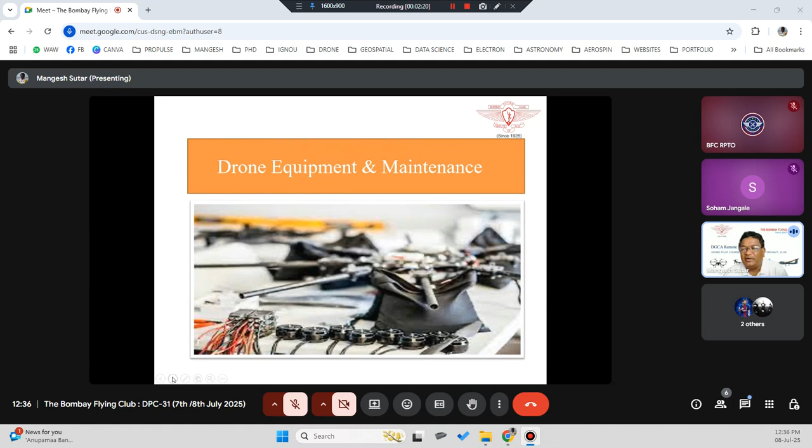Okay, so similarly our drone also requires a lot of maintenance. One is day to day regular maintenance, and one is comprehensive maintenance. Depending upon what is defined by your OEM, accordingly we will be doing our maintenance, but there is some regular pattern we have to follow for maintaining our drone.

Regular usage may result in wear and tear of the unmanned air vehicle, thus requiring regular maintenance checks. So every time you are going to take a flight, you are going to do some maintenance check, some pre-flight checks.

Comprehensive maintenance has to be performed after every 200 flights or 50 flight hours. This is similar to your car.

Whenever you take a new car, what happens is the first servicing has to be done within a period of 1 month or maybe 100 kilometers, whichever is earlier. If in one month you haven't driven 100 kilometers, but the month is complete, you still have to come for servicing. And if within 7 days you drive 100 kilometers, then immediately after 100 kilometers you have to take your car to the service center.

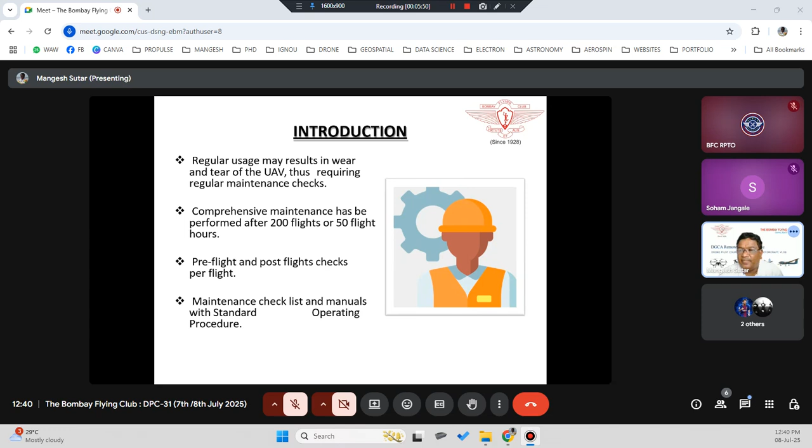So what are the things covered in the checklist? One is structural inspection. You are actually checking the structure of the drone. Clean the airframe of mud and dirt, inspect the airframe for cracks, check for any loose screws, check propellers for damages, check propeller for free-spinning, check motor for debris and obstructions, check wirings and solder joints, check gimbal and camera lens are clean, check landing gear condition, inspect antennas.

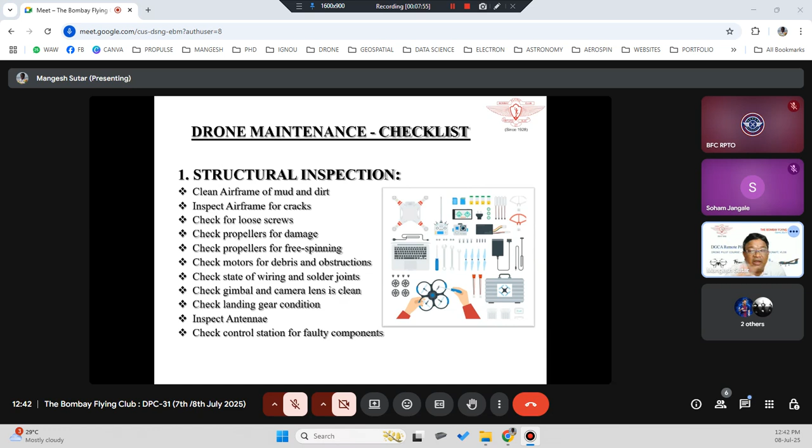One time a guy dropped our remote control, and it fell on the antenna, so the antenna broke - there was a crack. We just ignored that at the time, but later we started facing problems when communicating. We realized the antenna was damaged, so we immediately ordered a new antenna and replaced it. It started functioning properly. So never ignore even minor defects or minor issues - it can lead to bigger problems later. In aviation, the instruction is very clear: even the smallest crack or smallest missing item should not be ignored. This is a rule of aviation.

Drone maintenance checklist also includes battery checks - inspect charger for visible damage, inspect battery packs for bulge or leakages. Make sure you charge all the batteries. Do not use half charged batteries. Make sure whenever you are taking a flight, your batteries are 100% charged. Don't use half charged batteries.

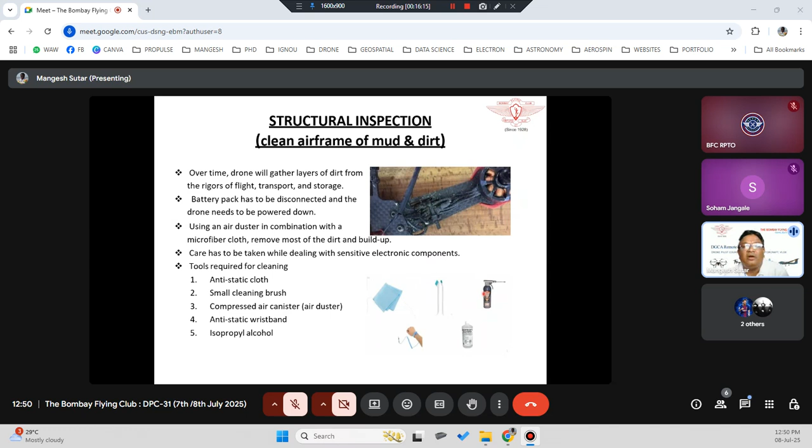Check and inspect the airframe for cracks. As I said, even the smallest crack can cause a critical problem if left unnoticed. It's a rule of aviation that even the smallest crack should be documented and rectified on time — don't live with that problem.

So rectify it on time. During routine maintenance, check each component carefully and make a note of any damage you find. Whenever you run your checklist, if you find any problem, make a note. Make sure that note is visible to the person auditing it, and that it gets rectified before the next flight — that's your job.

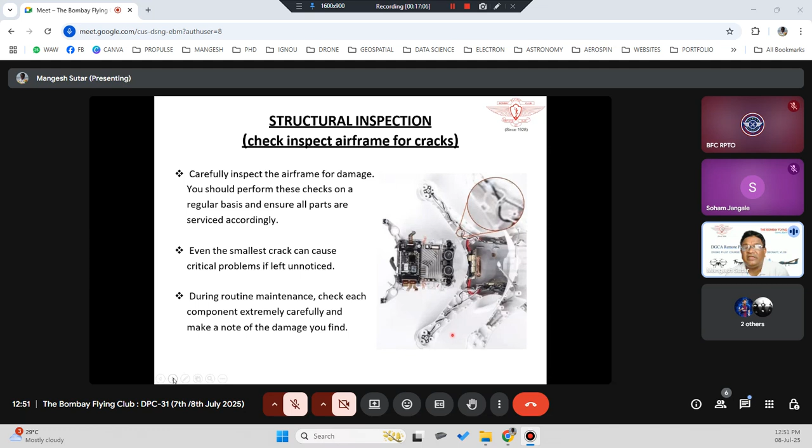Don't hesitate to put remarks in the maintenance log. If you feel there's a problem, there is a problem. You'll be safeguarding yourself in your activity and your task.

Every component should be securely tightened in place during maintenance repair. Double-check the fastening bolts, but don't over-tighten. A lot of times when we change a component, we tighten it too much.

That over-tightening can cause cracks — like you can see here, there's a crack because of over-tightening the nut and bolt. So don't over-tighten, and don't put unnecessary stress — tighten only as much as needed, not more.

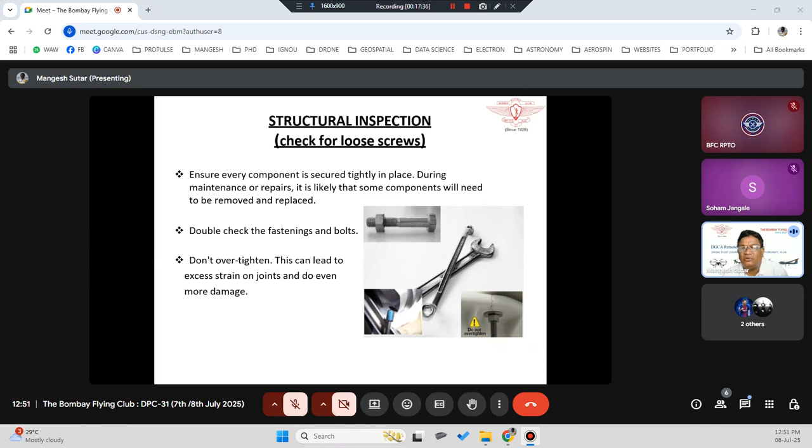Propellers are the only component that go through a lot of stress and movement, so they're the most likely to get damaged quickly. Dirty, chipped, or cracked propellers should be removed — if there's dirt, get it cleaned.

If there's a break or crack on the propeller, you should replace it immediately. Inspect for cracks and check the proper fitting of the props to the motor.

Unattended cracks can lead to mid-flight failures. If there's a crack, clearly visible, you should not take the flight — you should immediately replace that propeller, because a crack can break further under flight stress.

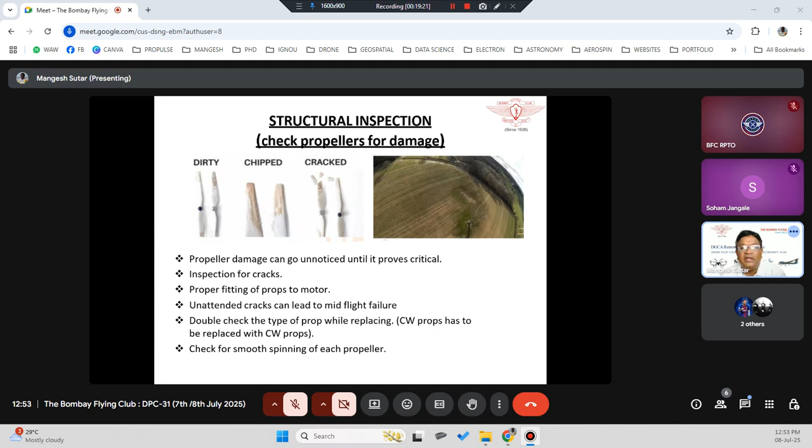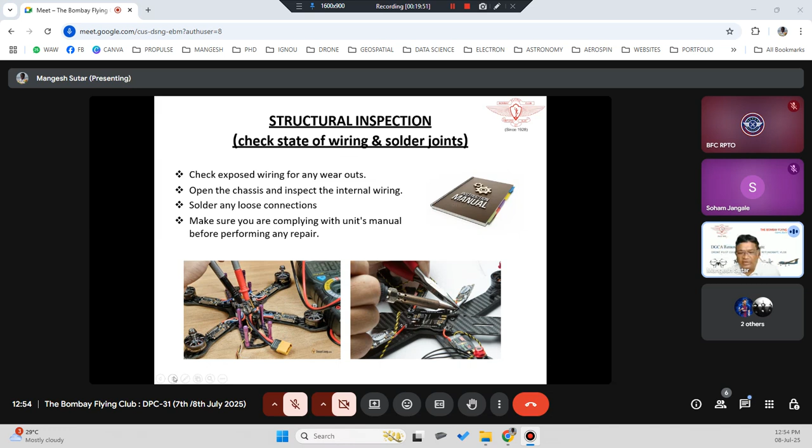Check the state of wirings and solder joints. If you have an FPV-type drone or any drone where the soldering joints are visible, make sure you check them. Sometimes due to weather or dryness over time, the solder joint dries out and you lose the connection, or the connection breaks entirely because of climatic impact. It happens sometimes. So make sure that is clean.

Again, if you feel there is some friction happening in the motor, you can open the motor provided you are aware of how to do it. If you are not aware, don't do that - call a technician or specialized person who knows how to do it.

Or you can attempt it on your own, but your drone may be under warranty or AMC. If it is under warranty or AMC, always ask for the engineer to come and do it. Our drones are under warranty and AMC.

So normally I never do it myself, except changing the propeller - that's the basic thing. But if there is something internal, a software related problem, or anything else, I will always log a case with the OEM. The engineer will visit my place, do the necessary check, do a test flight, and then certify that the drone is in good shape.

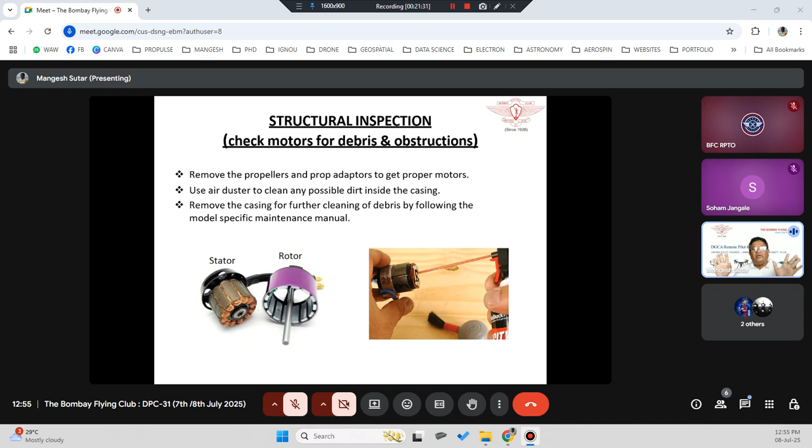So structural inspection again for all - the camera unit, the landing gear. Like yesterday I talked about it, whether spring loaded or hydraulic loaded landing gears are there. Whatever is there, you should make sure they have smooth movement, smooth functionality, normal functionality, whatever.

A lot of times your landing gear will also have rubber rollers, just to safeguard the metal part of it - there's a bit of rubber cushioning on it. So sometimes over a period of time, with multiple landings, say 100 up and down landings, that rubber gets worn out.

A lot of people, when you order, you don't just get one rubber matting or rubber roller - you get 4, whatever is required, 4 or 6 you will get. So normally people think one is worn out, let me just remove and change that one. But then your drone will be uneven. So when you are changing those rubber rollers, you have to make sure you change all 4.

Don't compromise on that - change all 4, because even if the others are more or less worn out too, don't leave it uneven for your drone, because a new one will be in noticeably better condition.

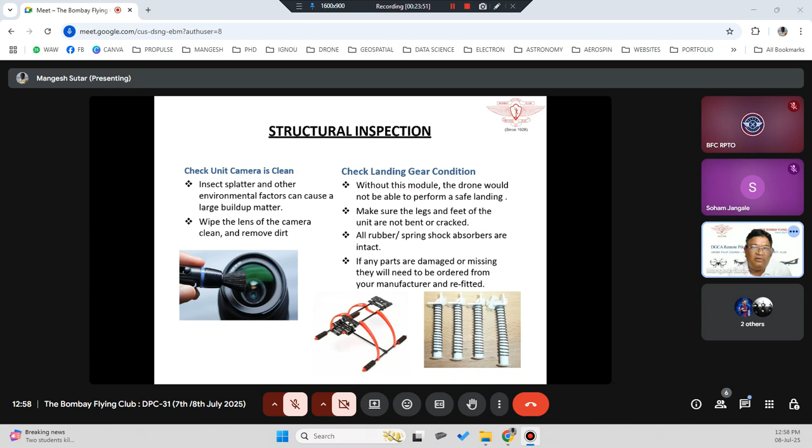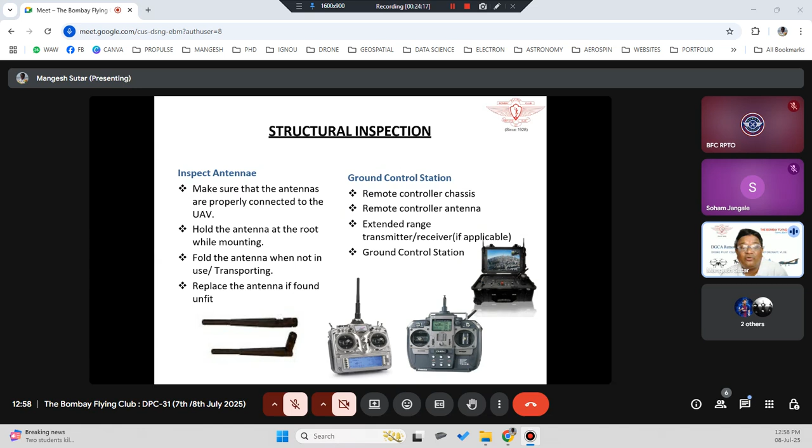Structural inspection for antenna, ground control station hum log discuss kiya, like antenna agar kuch break hai, yeh hai. When you are operating your antenna, it should always be open, straight, pointing towards the drone, and all the things you should make sure. Okay, so this is what important. Transportation ke time pe, folding ke time pe kabhi kabhi antenna toota hai, break hota hai, fault ho jaata hai, crack ho jaata hai. So if you found that kind of problem, you should replace those antennas.

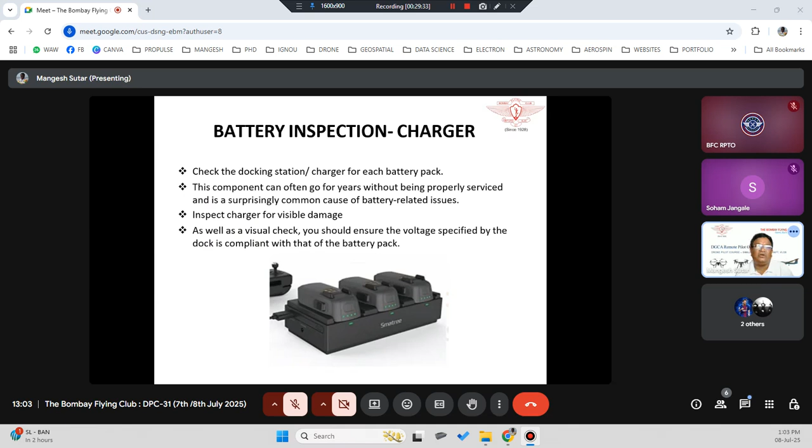I will tell you to do it yourself. If you want to do it, you can do it; if you don't, I will do it. But me doing it is no point - you have come here for learning. Take that opportunity, because tomorrow, once you are out of the training site, you are not going to do all these things. So whatever time you spend in the next 3 days from tomorrow, spend that considerable time learning things about drone technology.

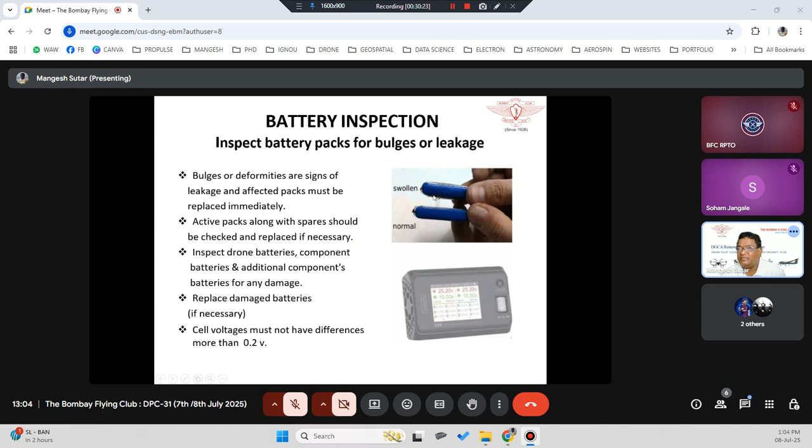We talked about updating the drone firmware and software. For DJI drones, DJI recommends always keeping the software and firmware updated. But for type certified drones, DGCA doesn't recommend updating. So depending upon what drones you are using, you have to take a call on this.

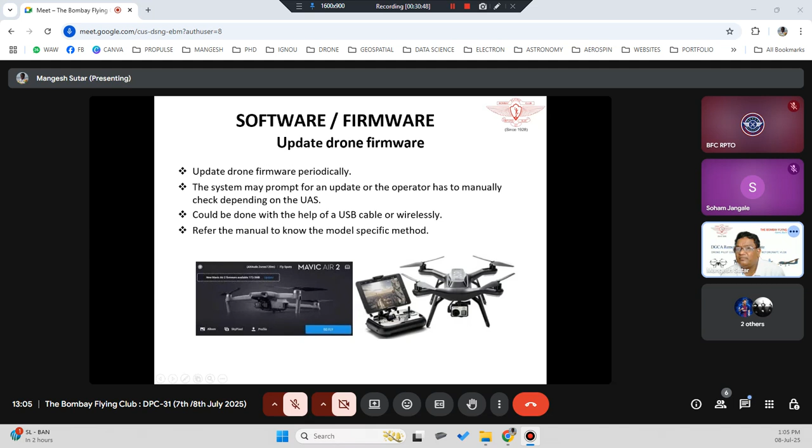Okay, again for the software also the same thing. So when you should schedule servicing - you should schedule servicing for airframe, propellers, motor, gimbal, landing gear, camera, depending upon the usages.

So whenever you are servicing, make sure that you are disconnecting the batteries and everything, and then you are doing the servicing. Whether you are changing the motor, propeller, or airframe, whatever changes you are going to do, make sure you dismantle, put things properly, and do the changes. When you change it back, you have to do all the checks properly, and only then should you fly it. That's what we call a test flight.

So if it is done by the service person or technician, he will normally do a test flight and make a remark: test flight done for 5 minutes, all conditions proper, functioning properly, found no problem. He'll certify the drone. You have to make sure he writes this; if he is not writing, ask him to write. He has to certify that this drone is good to fly, by another person - that is what he needs to certify as a technician.

Okay, the propellers, as I told you, we'll discuss this in detail when we see the actual drone and propellers - changing of the propellers and all that. So remove the damaged propeller, observe the propeller orientation, retrieve matching replacement. If clockwise is removed, put it back clockwise; if counter-clockwise is removed, put it back counter-clockwise. That's what it's trying to say.

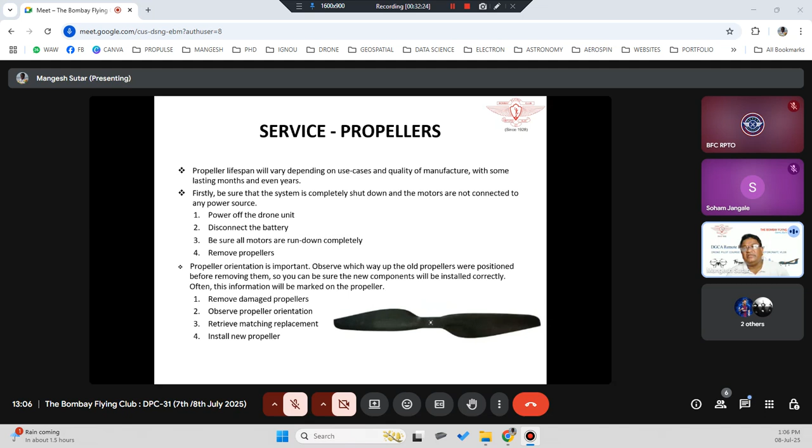Service the motor in case your motor is faulty, not functioning properly, your drone is becoming unbalanced, and you suspect the motor is the problem - you can always replace the motor. If you know how to do it, because at that point you may have to open the entire drone, since wires go inside the canopy, you'll need to open the canopy too. If you are not certified or not authorized, don't do it. If your drone is under AMC and warranty, let the technician come and do these changes. Because when you replace the motor, fine tuning and configuration has to be done, which you may not have the login for, since most OEMs don't give admin logins. So their service person or technician will come and do those activities.

Same goes for gimbal also. Gimbal also has motors, right? There are 2 motors, and if it's 3 axis there can be 3 motors too. So depending upon the type of gimbal, sometimes there can be problems, because this is also affected by climatic conditions - weather, and wherever you are flying, depending on what condition you are flying in.

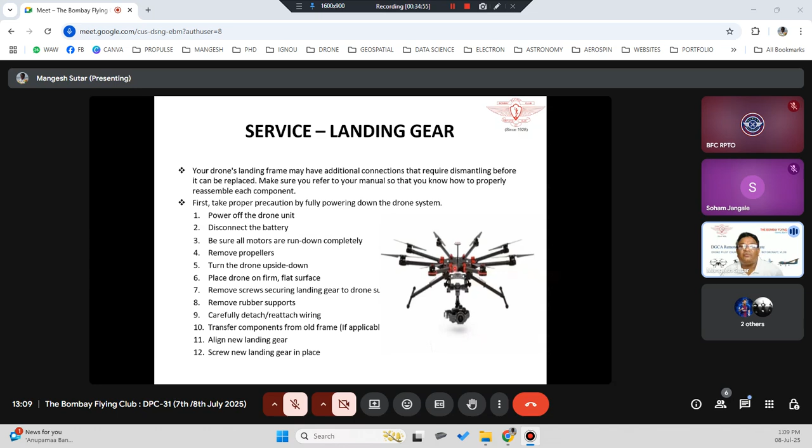Camera servicing, and so that's it. Normally when doing servicing, ideally 200 flights or 50-hour flight time is when you have to do comprehensive servicing of your drone. The first thing is to always make sure you do a structural inspection of your drone. If not possible, try to call an engineer or service technician to do the maintenance for your drone. Keep a record of your maintenance, and keep a record of all the equipment changed during the maintenance period.

If you change the propeller, change the motor, or change any component like landing gear, or even GPS component, or change the antennas - anything you change apart from the remote control and flight control, since those two components are tagged to your UIN number, it is not advisable to change those. In that scenario, you may have to consult your OEM, or take a decision to deregister that drone, replace it, and then register back.

For us, since our drone is also tagged to the RPTO, we cannot change like that because our drones are linked to our RPTOs. So any addition or deletion, we have to input to DGCA as well. If I remove this drone, add another drone, whatever I do, I have to intimate DGCA about it. They might suggest an audit, or ask me to share reports or pictures of whatever changes I am doing to the drones.